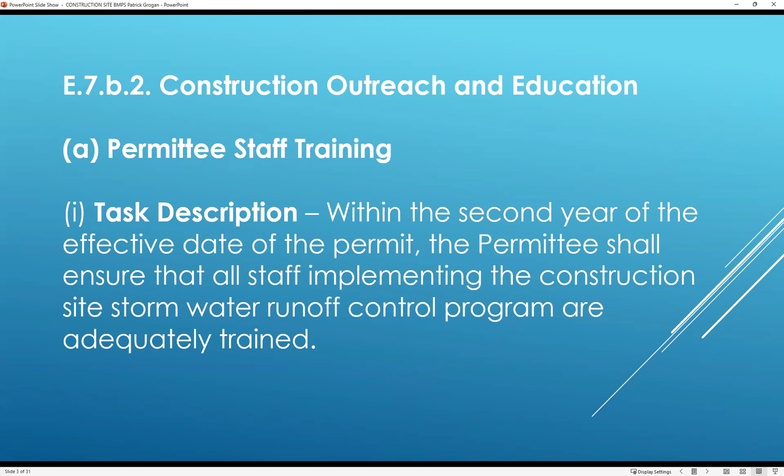This inspection is really aimed at site personnel who are going to be doing your site inspections, whether that's a building inspector or some public works employee. It kind of differs jurisdiction to jurisdiction, but this is for the people who will be going on site regularly. So this is a required training as part of your municipal stormwater permit. This is the specific requirement for E.7, and it is, like I said, aimed at municipal staff.

We're going to go through a brief overview here. These erosion control methods are applicable to construction general permit and non-construction general permit sites. Your municipality likely has some type of health and safety or erosion control muni code that's going to dictate what the requirements are for non-construction general permit sites. But the same techniques and products should be used on both sites.

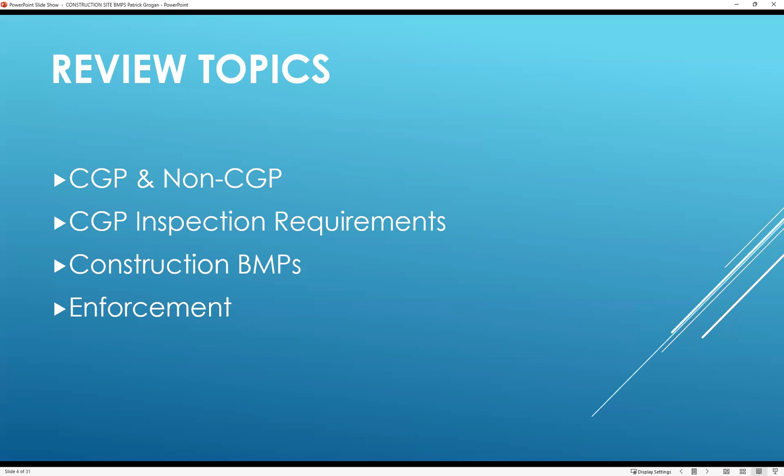We're going to go over the inspection requirements for CGP sites specifically, and then we're going to go through some of the proper installation methods and common problems for the different BMPs that are used, and then just a quick little topic on how you may want to pursue enforcement on sites that aren't compliant.

So who does the SWPPP inspections for your municipality? It varies jurisdiction to jurisdiction. In some locations, I have seen Public Works do the inspections while the grading permit is being worked on. And then once the building permit gets approved, building will take over the inspections. In some areas, they hire a consultant and neither municipal department does it. And then in some areas, it's one or the other. It's kind of up to you guys. If your municipality doesn't have that procedure laid out, I encourage you to start that conversation and get it figured out so that these sites that are causing sediment deposition into your storm drain aren't slipping through the cracks.

So for construction general permit sites specifically, they should have a QSP. If they're enrolled in the permit, they need to have a qualified SWPPP practitioner. That's usually a consultant that's hired by the owner or sometimes a general contractor that will be doing weekly and rain event related inspections and then relaying the corrections that are needed to the client, not to you. So the QSPs are really not working for the municipality. They're working for the site owner or the general contractor.

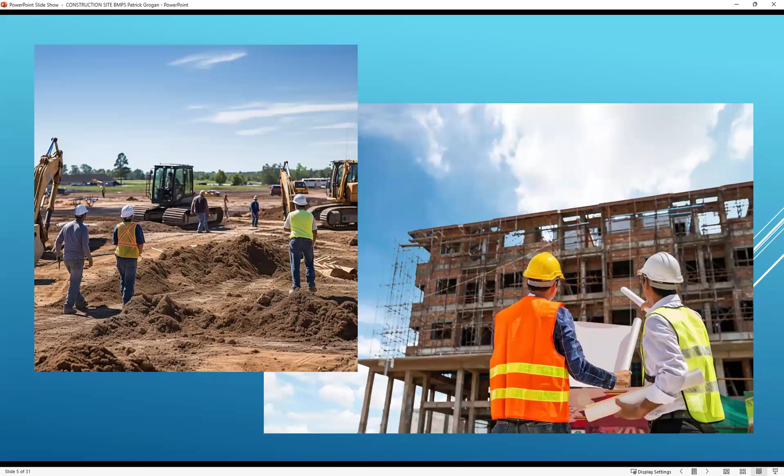It's great that they're doing the inspections. They almost always do a good job. But you have to keep in mind that they work for the client, not for the municipality. And even though we're working towards the same goal, you as the site inspector for the municipality should still be checking these things and then checking their reports to make sure that their advice is getting followed or that they're properly catching the problems.

So this is an example of a non-CGP site where the owner was performing a bunch of exterior flat work improvements. I believe in this case, they didn't even require a building permit because they weren't doing any structural or interior work or anything like that. They were just basically redoing the whole front yard.

And this is an example of how a non-CGP site can be causing problems. They had a lot of off-site tracking that if this was during the rainy season, could then end up in your storm drain system and cause maintenance issues. We ended up getting neighbor complaints about this lot, but one of the things to keep in mind is depending on who's doing the inspections, you may not even know a site is active.

So a CGP site, you're going to know that they're on a list. A building permit site, the building department at least is going to know that there's activity going on there. But if they're doing work that doesn't require a building permit, who's going to know? So this is where communication between departments is really important. And as you guys are driving around your cities, traveling to different sites, if you see another construction site you didn't know about, look into it, figure out what's going on with it.

This is a location where they should have been implementing erosion control. Had they applied for a building permit, I don't remember exactly if they did or not, but had they applied for one, the city would have given them an erosion control guide. And the erosion control guide that the city gives would have outlined the procedures that they could have taken and the materials they could have installed to prevent this problem. Whether or not they follow it, then you've got to follow up on.

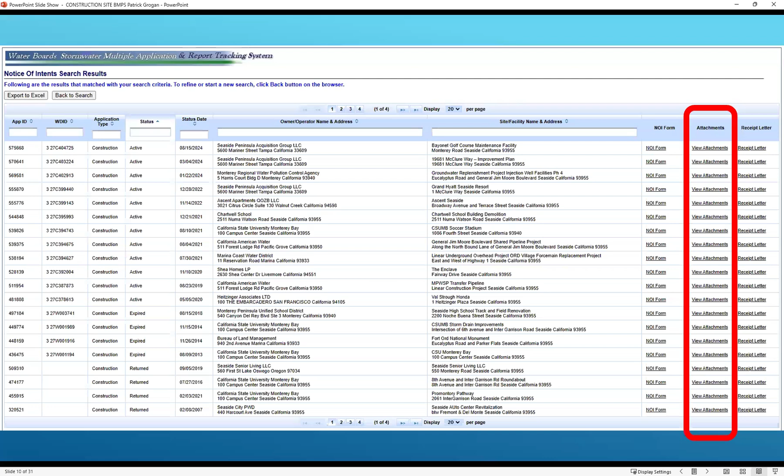I'd also like to point out that things like the erosion control plan, you can get from the SWPPP. They're also required submissions with your civil plan set. But the SWPPP is a living document. So especially for long sites, as they have problems and failures, they're supposed to be continually improving their erosion control plan. And those changes often don't get caught up in civil sets, especially once a permit's issued. They're not going to go amend that. So they are supposed to do it in the SWPPP. And if you know that they have amended an erosion control plan, this is probably where it's going to be if they are following all the rules and uploading the things that they're supposed to be uploading.

When they get a rain event in the forecast that is 50% chance of precipitation or greater, that triggers a pre-storm inspection. So every site, every risk level is going to get a pre-storm inspection. If you actually get precipitation, you're going to have a daily storm inspection for the risk level 2 and 3s. And you also need to check for stormwater discharges on those sites, and the QSP should be doing all this.

Also, the QSP should be doing a REAP, a rain event action plan, for all risk level 2 or 3 sites. That's a pretty simple kind of formulaic sheet that the QSP fills out ahead of time and gives to the site to let them know what specific BMPs they need to go take a look at and maybe correct, and what they should be expecting for the upcoming rain event.

And then after a rain event, if you have a qualifying rain event that dumps 1/2 inch of precipitation or more, you have to do a post-storm inspection. Both the pre-storm and the post-storm inspections by the QSP are supposed to be within 48 hours of the event. So 48 hours before, 48 hours after.

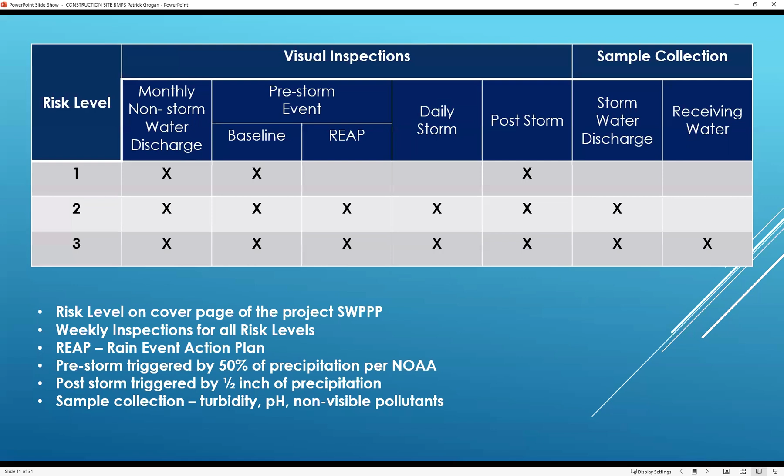They could have one in a central location. Maybe they only have one job trailer for their large development. That's fine, as long as they have that information somewhere and they can give it to you. Even if that's electronically, as long as someone on site can give it to you right then, whether it's by email or hard copy or print it out for you, they have to have that there.

So this is just based on my anecdotal experience when I was doing QSP inspections. These are some of the most common BMP failures and SWPPP issues on sites. So when they're doing site grading, really common to have sediment discharge, especially from tracking where vehicles are carrying it off of the site. Almost always the construction site entrance does not meet the requirements for that BMP. Rarely do I see a construction site entrance that actually conforms to those requirements. We'll get into that later.

Dust control is also a big problem in the dry season. People think that they don't need to worry about SWPPP, and they forget that SWPPP isn't just about water-carried runoff. Wind is also a problem, especially if you have construction sites that are right next to large housing developments or businesses. If they're kicking up a lot of dust and that's drifting into those businesses and residences, that's a problem.

Once they start going upright and doing foundations, full concrete washouts are a problem. Contractors don't like to clean them out as much as they're supposed to, and they're often overlooked, and they can overflow. If they're temporary and they're fabricated on site, they can break and cause problems.

When they're doing framing work, you end up getting a lot of trades stacked on top of each other, and a lot of their scrap cuts and their trash end up getting piled off just by the corner of a building somewhere. Empty epoxy containers, treated wood waste, things like that, that don't always make it into a bin or a roll-off, and then you get a freak rain event and it gets washed into your gutter, or you have contaminated runoff from the chemicals that are there.

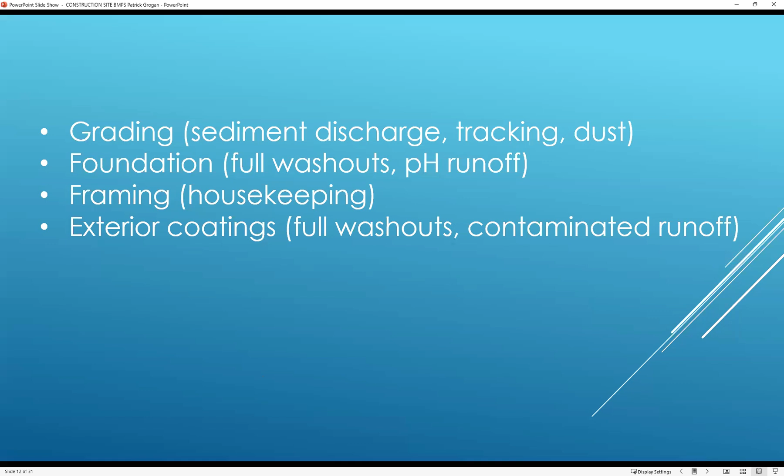Especially when you're doing like EIFS exterior coating systems that involve insulation or styrofoam, or you're doing any cutting of foam, you end up with a bunch of that little particulate. That's a big problem. And for exterior coatings, paint or stucco, or really any cementitious exterior coating, always comes with a big area that ends up getting affected with concrete dust and washouts and things like that. There are steps that they can take to help minimize those impacts, but that's one of the things that I see contractors not doing pretty frequently.

So first thing when you get to the job site, you step into the job trailer, you want to look for their SWPPP binder. They should have a big old thick binder that says SWPPP on it, and it should have all the inspection reports in it, as well as the SWPPP itself, the erosion control plan, and then any actions or inspections that the water board has also done, or any correction notices that you may have given the site.

So if you get there and you're looking for critical information, you should see a front page that looks something like that. It's going to have the risk level somewhere on it. That's going to let you know what inspections should be being done so that you can check the binder and see that they're there. They should also have the owner's contact information and who prepared the SWPPP. They don't always have who the QSP is. A lot of times they'll staple their card to the front of the binder or something like that. So that's always good to look for.

They're required to have this on site or at least nearby, somewhere that you can access it whenever you want to. Other important information on the front page is going to be the WDID number. That's the number that the water board gives them when they apply for the construction general permit.

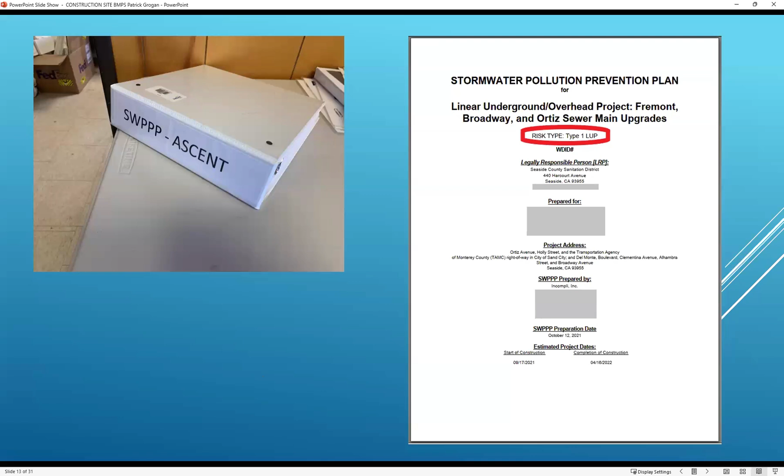So getting into actual BMPs, construction site entrances, almost never done correctly. Luckily, we got a big screen here for the people who are online. In case this is kind of small for you and you can't read it, I'll go through the important parts that are commonly not done correctly. So the main requirement is if they're using rock, it has to be 3-inch minimum to 6-inch maximum. Nothing smaller than 3 inches, nothing bigger than 6 inches.

Quite often you'll see people put down like class 2 drain rock or something like that for their site entrance. Problem with that is it's not bumpy enough. It smooths out when the tires and the vehicles are rolling over it. There's no agitation or action to help knock off that mud or that sediment. Also, commonly now we're seeing like the yellow tracking plates that have the pyramid shaped cones on them, or you might see the old style, the bar plates. Those will end up filling up with sediment, and those are things that need to be looked at.

The other most common problem is that they don't meet the minimum length requirements. So there's 2 measurements given here for total length. One is 50 feet minimum. The other one is 4 times the circumference of the largest tire on the site. A semi tire, the circumference is about 10 feet, but when you have backhoes or larger equipment that have larger construction tires, those are going to mean that you need more than 50 feet length in order to have proper tracking control by the BMP.

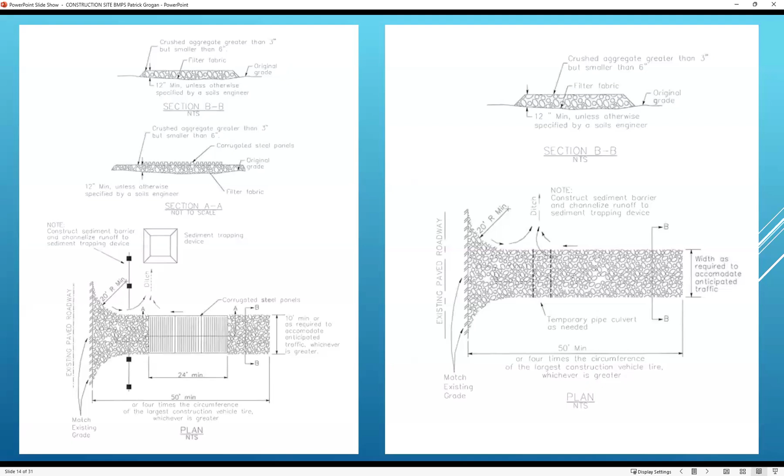Also, when they're doing a rock entrance, it's supposed to have a minimum depth of 12 inches. And they're also supposed to clean it out periodically. They want to lay it out in such a way that if the site drains off this entrance, they have a drainage ditch or some type of topographical feature that will channel any flow that runs across this entrance away from the entrance of the site. Whether they cut a little ditch, whether they put in a swale, something like that.

So this is kind of the typical construction entrance that we see. And this one was actually really good. I went around, I drove all over Seaside. This was the best one I saw. Still had a couple problems. They were just shy on the length.

They were close, but you don't get points for being close. You got to hit 50 feet minimum. So I don't remember exactly what they were, but they were 40 something feet. Also, they had filled in a lot of their rock. They had smaller rock than 3 inches in there. So once you got past the tracking plates, it wasn't really bumpy. It was a pretty smooth ride for the passenger car that I was in, so it wasn't really going to knock loose any sediment that was on any vehicle crossing it.

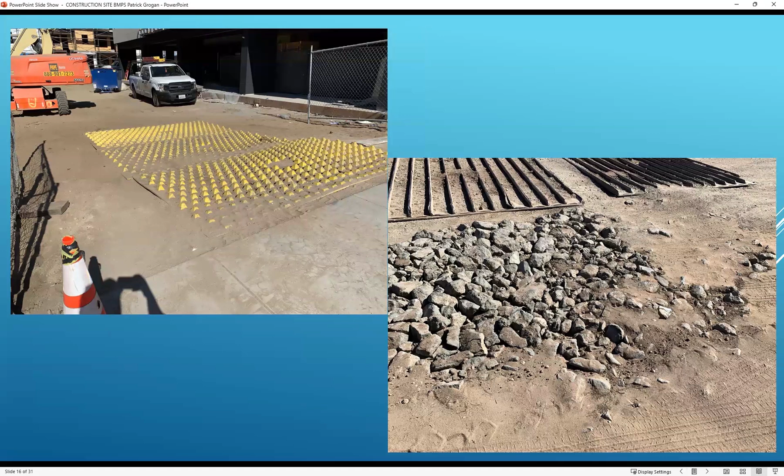These are some of the worst ones. As you can see here, really easy to get around those, especially this is a picture of those newer style tracking plates that we're starting to see. You can see that it's starting to fill up with dirt and sediment. Periodic cleaning is required, at least every couple of months or as needed. So if your site is filling up its tracking control, its cattle grates, whatever, within a couple of weeks, you got to go lift them up, clean them out, and put them back.

Often it's a good idea for people to put some type of filter fabric or some other layer down under it so that it's easier to pick it up and then sweep off and remove the loose sediment. You get a lot of the fine particulate sediment, silts and sands and just stuff that gets pounded down into nothing that packs those in. And if you just set the grate back in it, it'll fill right back up again. So you want to make sure that they are periodically picking up the grate, cleaning out all the loose stuff as needed, and then putting it back down.

Also, another example of the correct size rock, but getting filled in with smaller stuff and dirt as vehicles drive around it. You can even see the tire tracks on either side. So fencing placement here, you can see that if they had just closed this fence up a little bit to the edges of the yellow tracking plates, they would have made an effective enough barrier that vehicles would be forced to drive on the tracking plates. Still not long enough, but at least people wouldn't be dropping wheels off the side like they are here.

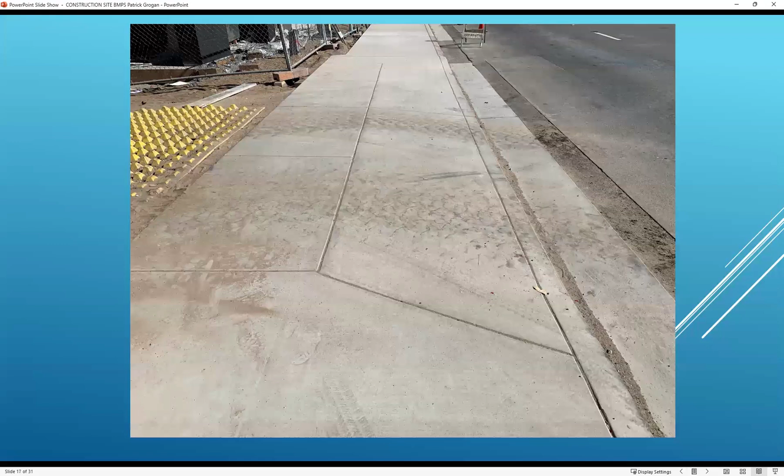And then this is what it results in. This isn't that bad. They had cleaned this up not that far before I came, but they were still getting people taking stuff off site, and they ended up with a couple inches worth of sediment in the gutter. This was in advance of a rainstorm, so they did go out and sweep up that gutter. But if they are having tracking problems like this and they haven't implemented sweeping or something else, that might be a requirement that you force them to put in place. Or you as the municipality, if you have street sweeping, you can do it and charge them for it. But tracking, even minor tracking like this, isn't allowed. It's got to be nothing coming off that site.

So fiber rolls, also commonly not installed correctly. Fiber rolls are supposed to be trenched into the ground a few inches. 2 inches is pretty standard. And then they have to be staked or otherwise secured. I've seen like gravel bags or sandbags used every 4 feet. That's fine as long as there's no daylight between the bags.

When I was a QSP, I had a site that was having trouble with their fiber rolls. Minorly, everything was good except for a couple areas, and the municipality's inspector was on his hands and knees looking under the fiber roll for daylight, finding a couple areas and then making them go fix it. Technically, he is right, pretty extreme, but the point of a fiber roll is to catch a flow, hopefully a sheet flow, and then filter out some of that sediment as it passes through it. So if there's daylight under it, it's not being effective in its placement.

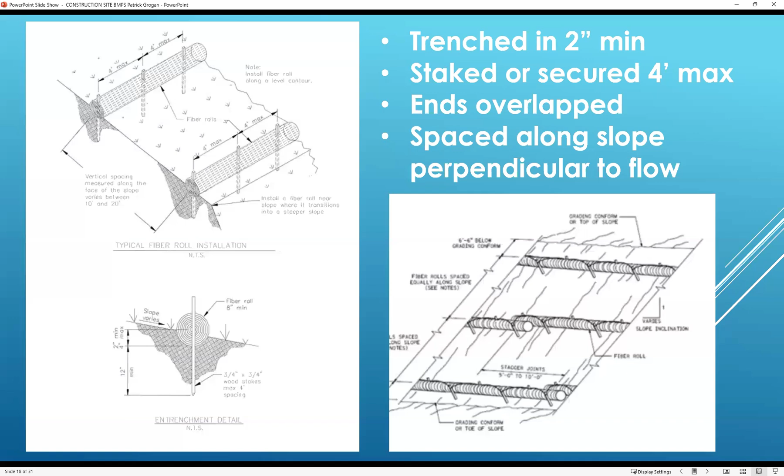The ends also should be overlapped by at least a foot. Commonly, they're not. They're just butted end to end. That leaves a space for water to collect and flow through and possibly cause channel flow, and that's a problem. These also are supposed to be cleaned out periodically or replaced. The rule of thumb is 1/3 the depth of the sediment control. So these are normally like 6 to 8 inches tall. So if you get 1/3 of the way up the exposed depth, they need to replace that or clear out the sediment.

Here's a couple of pictures from stuff when I was walking around. You have them not placed at the site perimeter, not placed correctly here. They're just kind of slapped down. They're not even staked in. And they need to be placed at the edge of the disturbed area. Otherwise, it's not going to fully prevent sediments from leaving the site during the rain.

Also, fiber rolls stacked on top of fiber rolls. One fills up, they slap another one on top and call it good. Not supposed to do that. Or the ends aren't properly overlapped. That's a spot where you're going to get water maybe transitioning to channel flow from sheet flow and causing greater erosion.

Not pictured, but also common, damaged, ripped, or flattened fiber rolls. They've been there for a year. They're past their service life. People run over them with cars. They get flattened out, or they're ripped or cut. Not supposed to happen. So if they're damaged, they're supposed to be replaced.

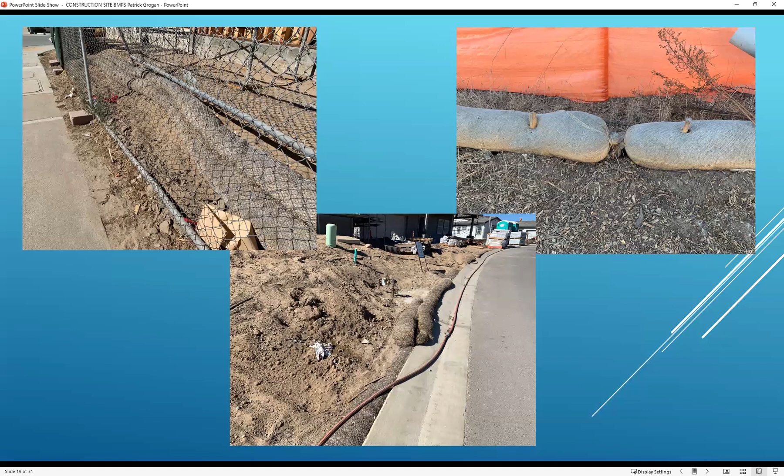Moving on to silt fence. Commonly not properly trenched in and staked down. So silt fence is intended to detain water. It's intended to detain sediment-laden water so that the sediment has time to settle out and the water will collect and disperse. The problem with that is that silt fence needs to be placed in such a way that it doesn't channelize flow. So it's not even meant to really intercept a flow, more to just delay the time on site so that the sediment can drop out of it.

Commonly, it's put at the perimeter of projects, which can be fine, but can also be a problem if it's placed like across a drainage channel. These are also suitable below the toe of a slope. I think 3 feet away is kind of what the guidance says. Or you can do it closer if you don't have 3 feet, but a couple feet past the toe of a slope or along a stream channel. So going with the stream channel, not across the stream channel. They can be used in the event of increased stream elevation.

Silt fence is not designed to redirect concentrated flows and should only be used for sheet flow. Cannot be used to divert water. You're just going to end up getting a blowout and causing more erosion and more problems. It's also not intended for mid-slope or top-of-slope conditions. Same thing, you're going to end up with a blowout and you're going to get some real erosion or some other channelized flow that just takes a bunch of sediment down with it.

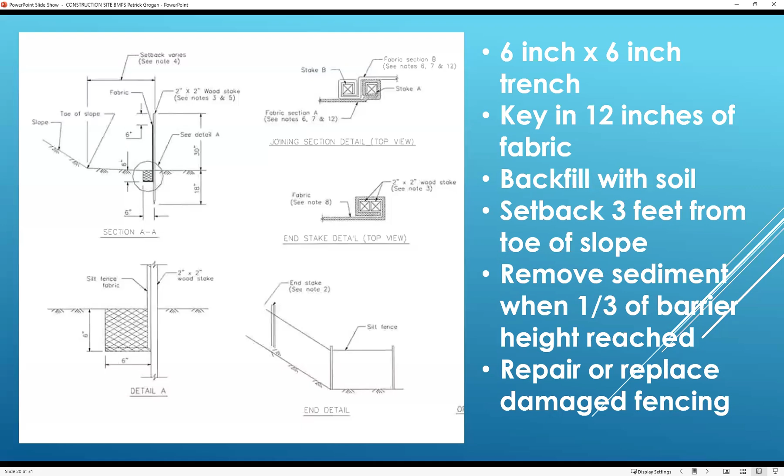To properly install the silt fencing, they're supposed to excavate a 6 by 6 inch trench and key in approximately 12 inches of the fabric. On all silt fences, there is a line on the bottom of the fabric that's 12 inches above the bottom where it's not stapled in. That's the line that it's supposed to be buried to. And with this, you're also supposed to remove or clean out when it's at 1/3 the height with sediment accumulation.

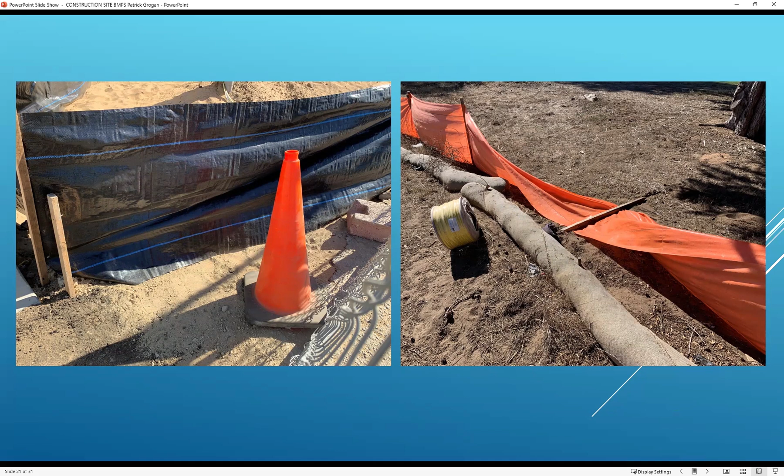So here's an example. You can see that blue line where this should have been buried to and wasn't. This is really common, or you see it not being staked in very securely. The stake hole is a little loose. Wind comes along, someone knocks it over, and it never gets picked back up. So these are kind of the most common problems with silt fence not being installed correctly. It takes time to install it correctly, and that's man hours. People don't really want to do it.

Also, one that almost never gets caught, covered roll-off bins or covered trash cans. A site is required to cover their waste disposal in advance of a rain. If it's being used, it can be uncovered, but before the rain starts, you've got to cover it. Tarp, plastic, some of them come with the covers. That's great. This isn't just roll-off bins. It's also trash cans next to portable toilets or any trash piles that people have been leaving out on the site. They need to pick it up, put it in the bin, and then cover it.

They're also not supposed to have a full bin. When the bin starts to get full, they need to come get it emptied. Whether that's calling the company early or what, they just need to come get it emptied. It also needs to be protected from wind. If you are on a windy site, if you're in a windy area, a common problem is the wind picking up the lighter trash and blowing it out of the bin. They have to take steps to do that.

Also covered in advance of a rainstorm are washouts. Paint washouts, concrete washouts, things like that. You are not supposed to have uncovered washouts, especially if there's liquid in them. If your washout is uncovered and it's your paint washout and then it fills up with rainwater and overflows, big problem. Now you're supposed to be testing if it goes off site for contaminants and other things like that.

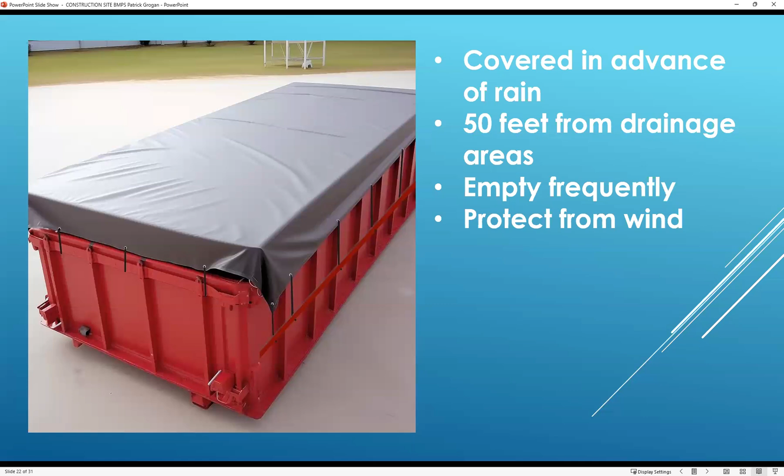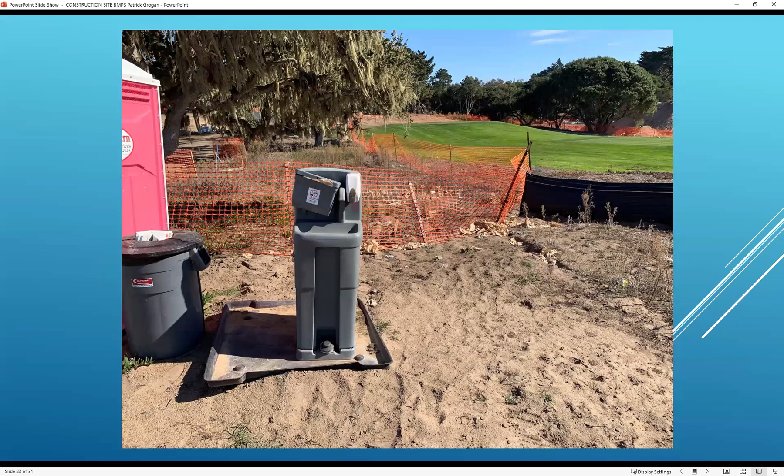Also notice the tray under the hand wash station. I wasn't able to find a picture of a porta potty without one, but they are required. That's what they look like. This is what it looks like when they don't have one. Normal porta potty, most people walk right by it, think, yeah, no problem. You're supposed to have containment on your porta potties. There's a chemical in there for the waste receptacle. If that doesn't have it and it overflows or something else happens and it spills, that's a problem.

This is really common where they're not placing a tray. Like I said, I didn't see any when I walked around. That was great. But this is a common thing that I saw when I was doing a lot of inspections.

Material containment. So proper containment is required for the following materials. This isn't a full list. This is just most of them. Soil stabilizers and binders, pesticides, herbicides, fertilizers, detergents, plaster, fuel, oil, and grease, asphalt, concrete components and compounds, hazardous materials and chemicals, and really any material that could be detrimental to the environment if released. That's what it says in their guidance. It's kind of a catch-all.

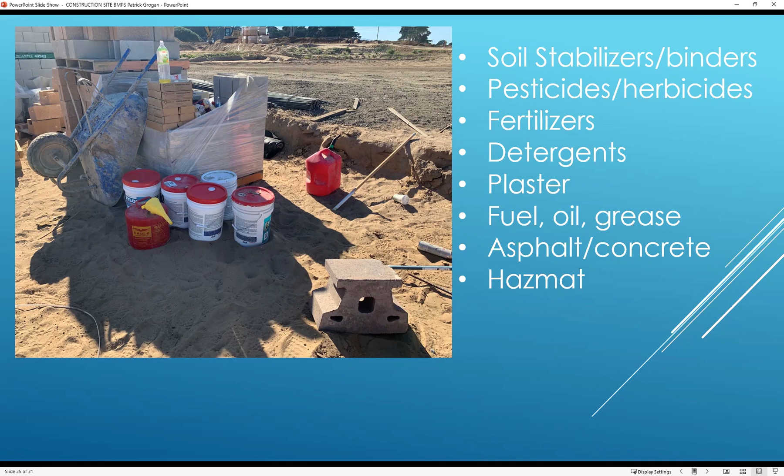Often, and especially when they're being used, you'll see people leave them out on the site. As long as they pick them up and go put them back in containment, that's great. What does containment look like? Kind of looks like this. So depending on what the product is, for example, bags of cementitious products, grout or cement or stucco or something like that, they can be stored on a pallet as long as they're covered in plastic. But things like fuel oils, grease, and other things like that need to be under cover or in some type of bermed containment. Chemicals must be stored in approved watertight containers with secondary containment or in a storage shed.

Storage areas on bare soil need to be bermed and lined. So you can't just plop it down on the sand, drop a fiber roll around it and call it good. You got to put down some plastic liner or something like that. Stored under cover when possible, especially cementitious products or erodible materials that are stored on pallets, and also keep a spill kit nearby.

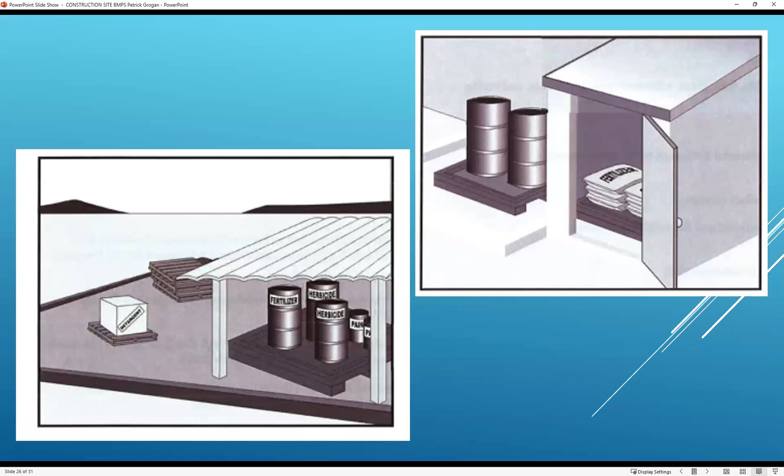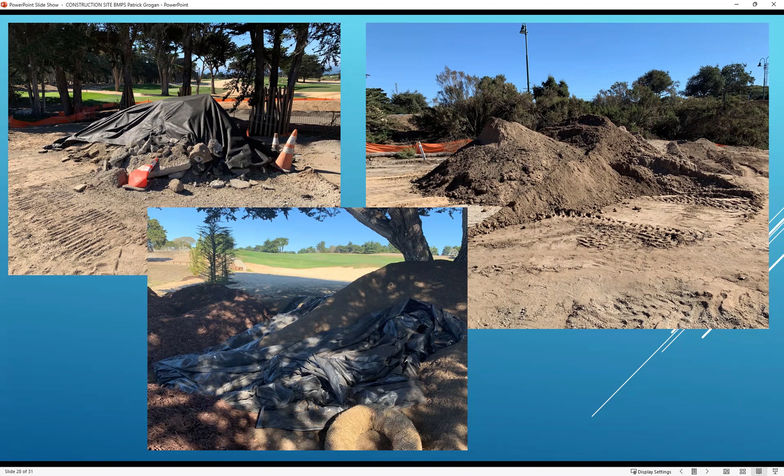Freeboard is the space from the surface of the water or solid to where it's going to overflow. Never supposed to have less than 4 inches. Also, no rips or tears in the lining. Often they will fill up a washout, make a new one right next to it, and leave that one there to harden. They are supposed to break it up, put it in their off haul, and get it taken care of. Concrete especially can really affect the pH of runoff, especially when it's fresh. It decreases as it gets older, but it's one of the common things that people forget about.

And when, did I hit next? Sorry.

When your washout breaks like that and overflows onto the site, this was like 30 feet from the site boundary. And the topography of the area was such that in a really bad rain event, it could have offloaded off the site and into our gutter.

Stockpile management, also a common one. Active stockpiles do not need to be covered. Inactive stockpiles do. What's an inactive stockpile? A stockpile is inactive if it's not scheduled to be utilized within the next 14 days. So a lot of people think that means that they can do nothing with it for 14 days and then cover it. If you don't plan to use that stockpile in the next 14 days, you have to cover it. It is inactive.

It also is supposed to be bermed. Often people will weigh down some fiber rolls around the edge of the stockpile. Or they won't completely cover the stockpile. They'll slap some plastic tarp over it or some polyethylene or something and call it good. Wind picks it up and moves it, or it doesn't reach all the way, or the seams open up where they've used multiple pieces of covering. They're supposed to be properly weighed down, sandbags, gravel bags, whatever weighted situation you have to get it to stay in place where the wind is going on.

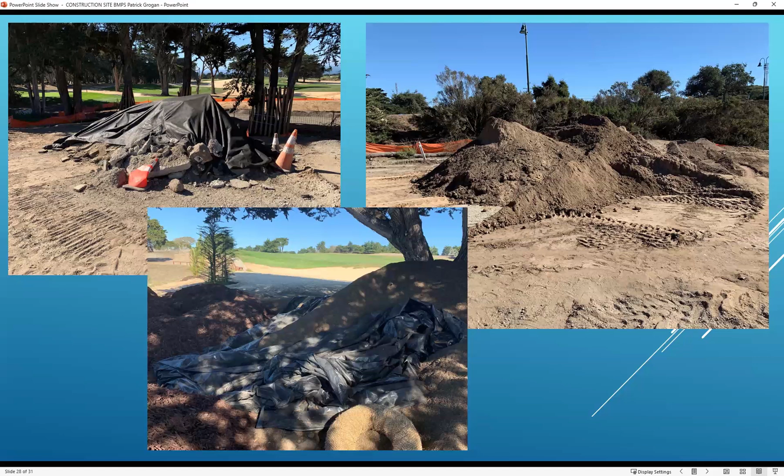How are we doing on time? Okay.

Dust control, big one that gets forgotten. Everybody just thinks of SWPPP as being a wet weather thing. It is also a dry weather thing. SWPPP is not just during the quote unquote rainy season, which is October 15th to April 15th. SWPPP is all the time. People don't like to hear that. They try and save money by having their QSPs not come out during the dry season. They're still supposed to come out and do their weekly inspections.

One of the common problems during that time is windblown dust, especially if you're doing something right next to a housing development or a bunch of businesses. So they're supposed to implement some type of dust control. If they're not going to be doing watering of the area, and they're also not going to be doing work in the area, they can use a soil stabilizer. Most common one is for them to use a water truck or some other means of moisture control for the soil. You need to be careful they don't do it so much that they cause off-site flows.

Leaky water trucks, leaky fire hydrants, stuff like that can be a problem. So during the dry season, you have to look for that. And just basically, are you getting complaints about it? Are you seeing dust when they're driving around? Then it needs to get fixed.

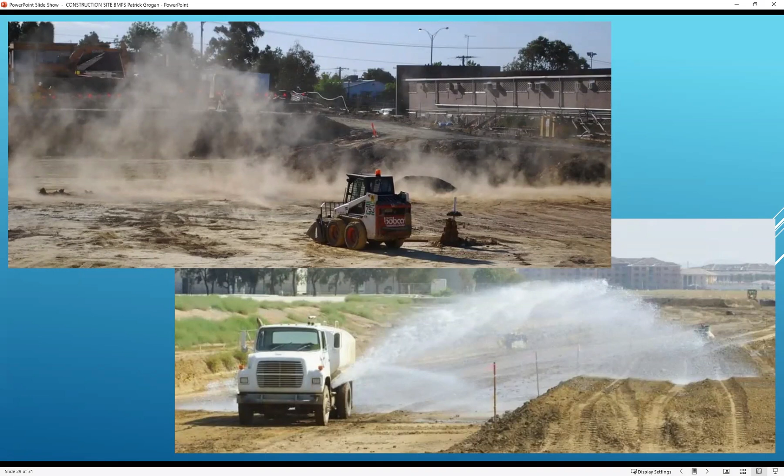Okay, so finishing up here. Enforcement. When I've had interactions and discussions with water board staff, they recommend 72 hours to correct deficiencies. That depends on if there's weather upcoming or not, and how severe the weather is going to be, and also what the history of the site is. When it comes to enforcement on a municipal level, it's kind of up to you. Hopefully your city has a standard procedure for this kind of thing. Often it would mirror code enforcement for building violations.

Oftentimes erosion control is required by your muni code. For Seaside, it's section 8.46, and it's under the health and safety one. Yours may be different, but it probably has the same kind of requirements and goals. So like I said, 72 hours is kind of standard unless you've got weather forecasted, or if they have a history of non-compliance and you need to start being more forceful with them.

A lot of these fixes and a lot of the common problems can be fixed right away. They're not hard. Maybe they need to go get a couple more materials, but in general, we're not asking for a lot of work to fix these. If it gets to it, and if you have erosion control in your muni code or in your jurisdiction code, you can elevate to a building official, a city engineer, a public works director. These sites have building permits. They have other things that have conditions that they conform to their erosion control plans.

Also, you can contact the water board. I have had sites where the water board has said, hey, we see on Google Earth imagery that this site that's been open for 2 years always has tracking every year when it gets photographed. Is there a problem with it? Do you need us to come take a look and see what's going on? If a site is not complying with your requests to fix their BMPs, the water board expects you to loop them in and contact them.

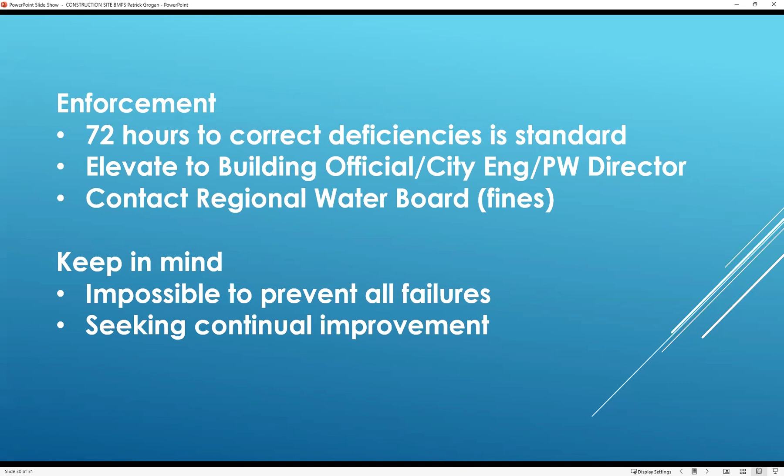If you do have a failure and your erosion control plan is not in place effectively, they should be talking with the QSP and submitting an amendment to the SWPPP with the revised erosion control plan. And also, if you have a site where they're just making an honest mistake, education tends to go over better than enforcement. If they are habitual offenders, then that's when you can start using your own judgment to determine how heavy-handed you want to be with it. So that is the conclusion.

Thank you very much. Just in closing, I wanted to say keep an eye out for erosion control issues whenever you're driving by a site or on the site. You're probably not there for that. You're probably going by to look at some plumbing, check some framing, something like that. But those erosion control issues are still going on. You're the person on site. No one else is. So when you're on site and you see it, say something, document it, send an email. Let whoever's supposed to be doing your SWPPP enforcement know that it needs to be corrected.

And if your municipality or jurisdiction hasn't implemented a standard procedure for how to do SWPPP inspections on all of your sites, non-CGP and CGP, start that conversation with your department head, your building official, whoever, so that you guys can get a procedure in place. If you get audited for your municipal permit by the water board, they will check that you have something in place. They want to see how you are doing these inspections. So having that documented and having a history of your inspections is going to be really important to provide that info to them. That's a requirement of your municipal permit. So yeah, and that's it.